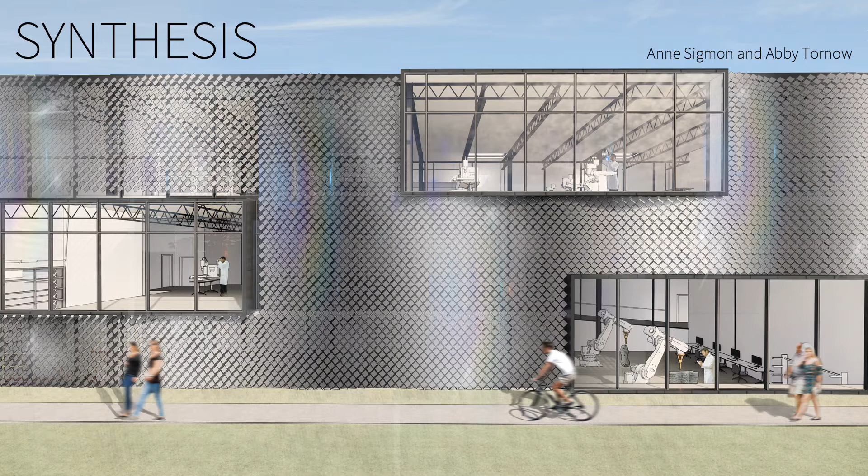Our proposal questions how architecture can bridge a gap between biology and technology. Our design synthesis is a space that utilizes computation and fabrication to construct sustainable and efficient building skins. At the simplest level, an architectural building skin is responsible for providing thermal comfort and protection to its users. But what if a building skin was able to provide for more of the user's needs?

Our site is located in Des Moines, Iowa at a historic Union Depot in the East Village. Throughout Des Moines, we see a range of building skins, from the gold-gilded dome at the Capitol to the copper and glass at the Chipperfield Library. These important buildings have become architectural icons for the city. But what if we widen the range of building skins throughout Des Moines and use today's knowledge of computation, technology,

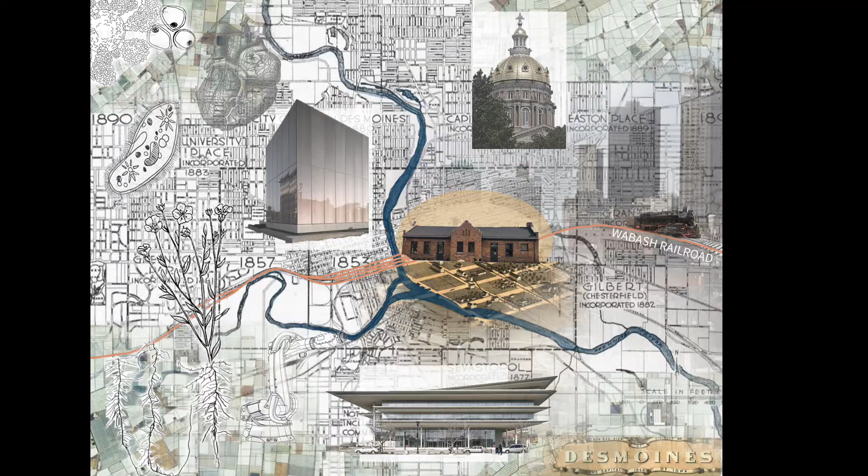and science to maximize efficiencies and sustainable practices? Our architectural proposal allows a space for fabrication and testing of future building materials. The existing historic Union Depot will remain on the site, and our new addition will provide a space for building materials to be fabricated and studied.

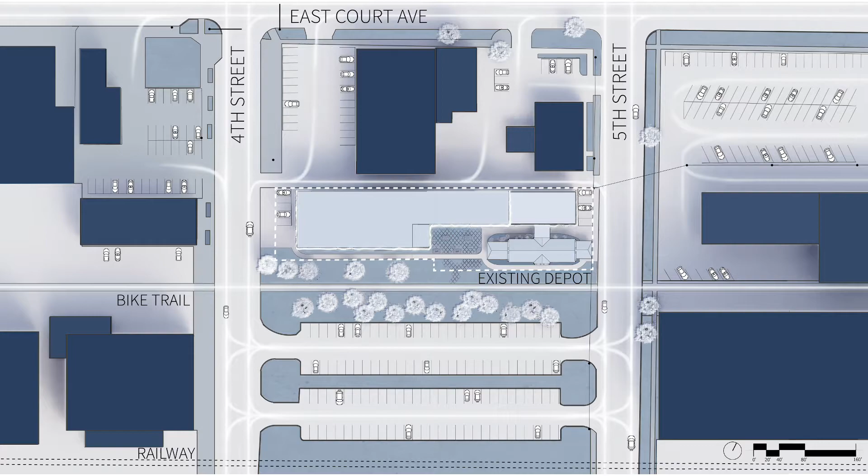Our building houses robotics labs, education classrooms, and a public cafe. The site has direct access to the old railway, which the city is converting into a bike path. This allows good public exposure to the pavilion space.

We have organized our building to maximize our surface area on the south facade. This is where we have designed our own building skin. This will be marked as the first adaptive facade in Des Moines. The south facade is important because of its access to sun throughout the day.

The orientation of our building allows all of our servant spaces, such as mechanical, bathrooms, and circulation, to be to the north of the site. This allowed us to utilize the south of the massing for robotics labs that can be viewed from the exterior.

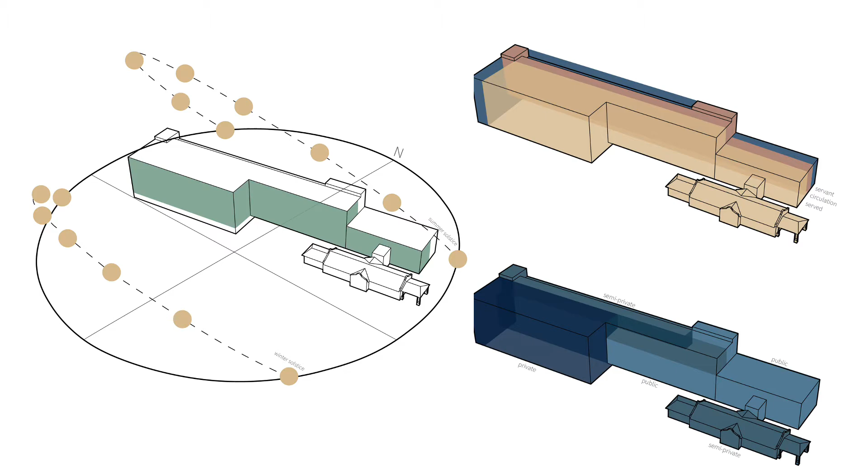Our circulation runs in between the served and servant spaces. The public has access to a majority of the first and second floor, but is able to see into the robotics labs. The third floor is private space reserved for the research team and special events.

Our main entrance is on the east of our building, next to the historic Union Depot. This is where our lobby and shop are located. This also includes a storefront of the existing depot that houses administrative offices.

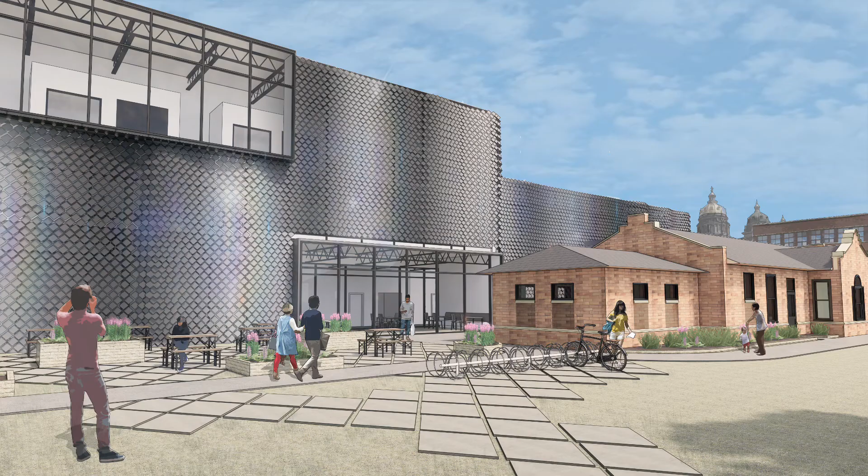Further into the center of the building is our public cafe and dining area, which has great access to the outdoor pavilion. The outdoor pavilion is directly connected to the bike path and can act as a rest stop for people riding through. All visitors have access to the public cafe and can use the outdoor seating.

Our lower level houses our first robotics lab that uses KUKA robots for fabrication. The level is 5 feet below grade, but utilizes a double height space for clearance of the KUKA robots. The public has access to views into the lab because of the accessible ramp running along the curtain wall.

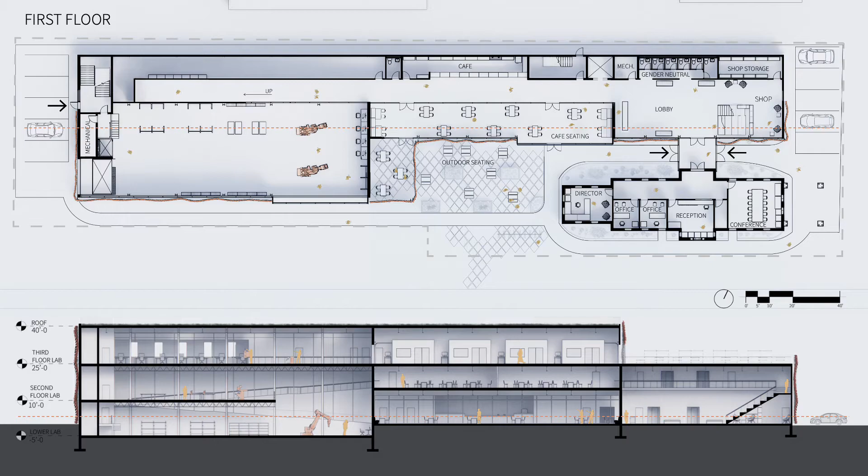There will be a variety of research, testing, and fabrication occurring in these labs. Researchers will study topics such as cell growth, chemical reactions, and ecosystems. The product of the research will be innovative building materials that mimic biological processes, fabricated by current technology.

The ramp also allows views to the fabrication lab on the second floor and access to the education classrooms. These classrooms allow a traditional space for the public to learn about the research occurring in the labs.

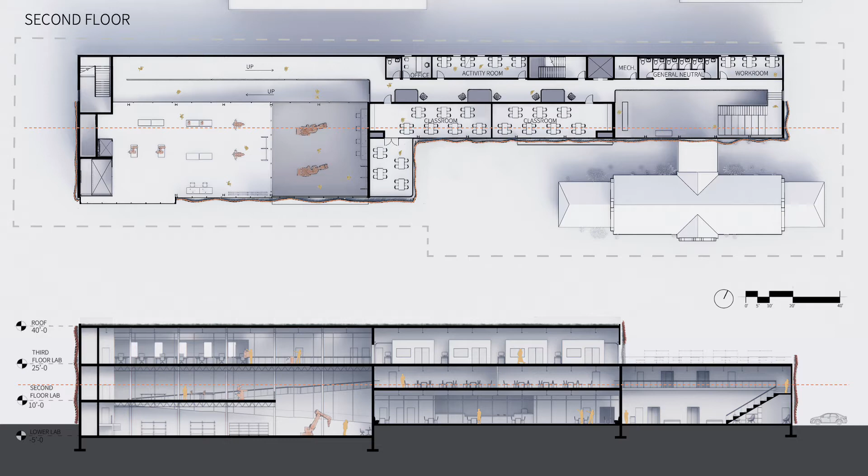The third floor has offices for the research team, an outdoor patio for events, and the remainder of our robotics labs.

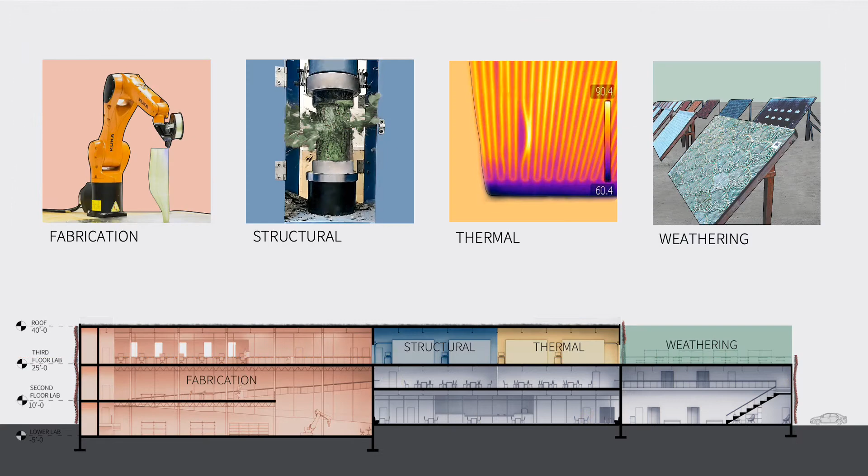The materials are delivered and enter the lab space on the west. We have a freight elevator to move the materials to all floors. The third floor is where material testing takes place, looking at structural, thermal, and weathering properties.

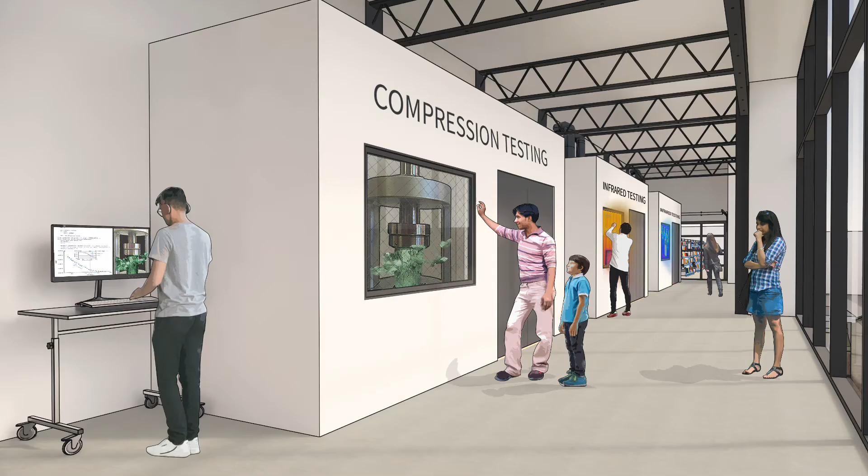We have control rooms that are able to manipulate the variables of the space to test the properties of new building materials. Compression testing evaluates the structural integrity of materials, such as a masonry block grown from bacteria. Infrared testing evaluates thermal properties, and weathering testing exposes materials to the natural elements.

Our structure allows us to have an open floor plan for our lab space, pushing all columns to the exterior. We are utilizing trusses to convey a light and open environment. We have placed thermal chimneys in the center of our building to passively cool our cafe, dining, and classrooms.

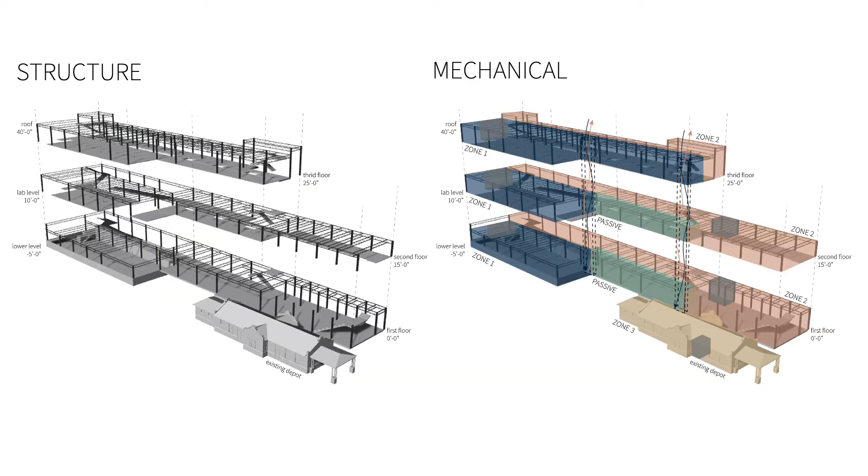We are utilizing a green roof to filter the rainwater and allow it to run down the cavity between our building and facade into an on-site cistern.

The south facade is constructed from soft robotics PV arrays. The facade skin attaches at the curtain wall mullions. We are utilizing custom brackets to vary the distance of the modules in order to create a fluid skin wrapping our building.

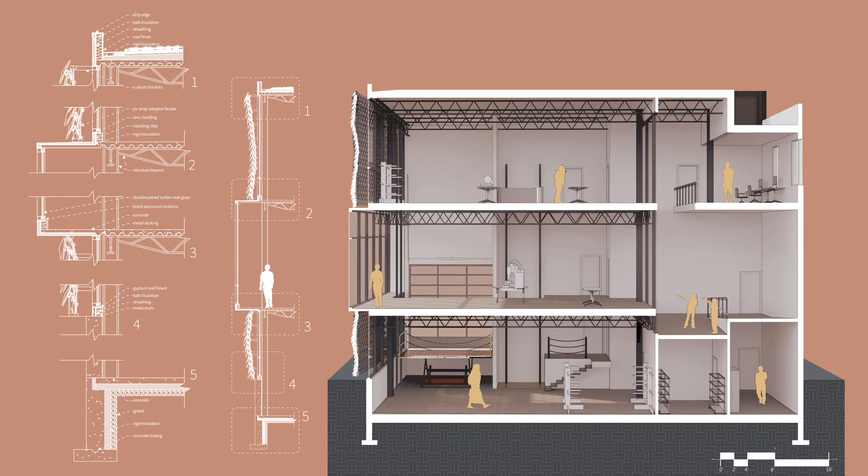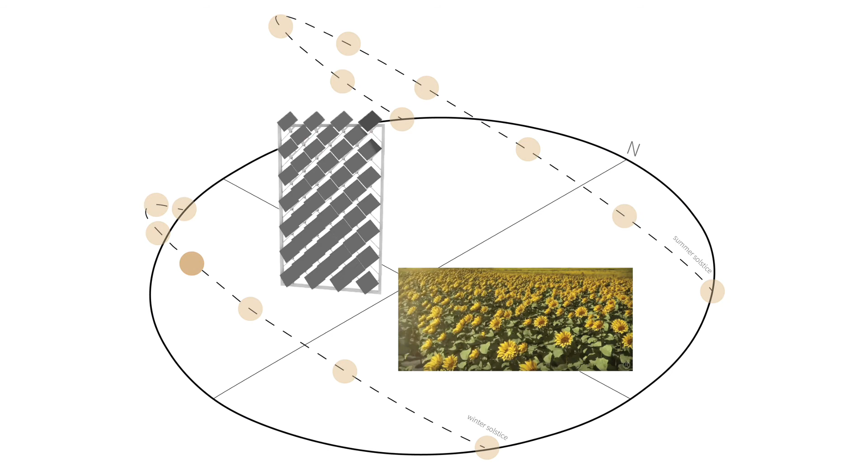The skin mimics heliotropism, the motion of plant parts in response to the direction of the sun. Plants use this process to maximize photosynthesis for energy, and we are utilizing a similar process to produce renewable energy. The skin is able to diffuse direct daylighting into large spaces like our labs and atrium.

Our project is meant to be a space that welcomes the public to learn about current research being conducted using today's technology and knowledge of sustainable architecture.

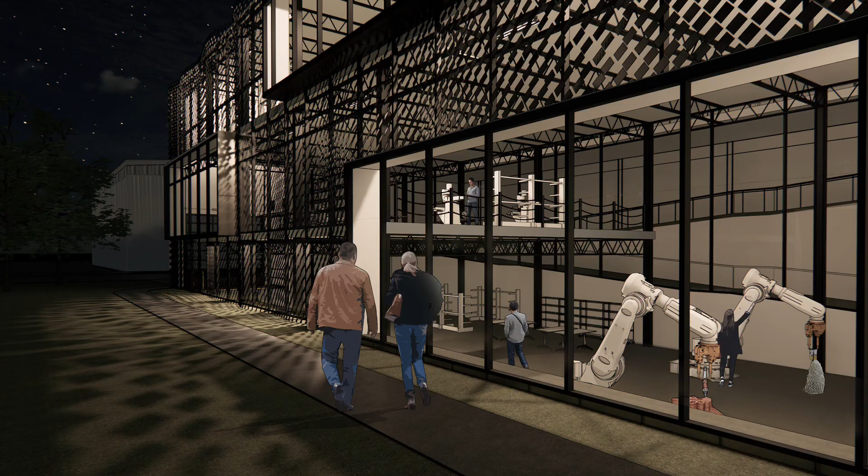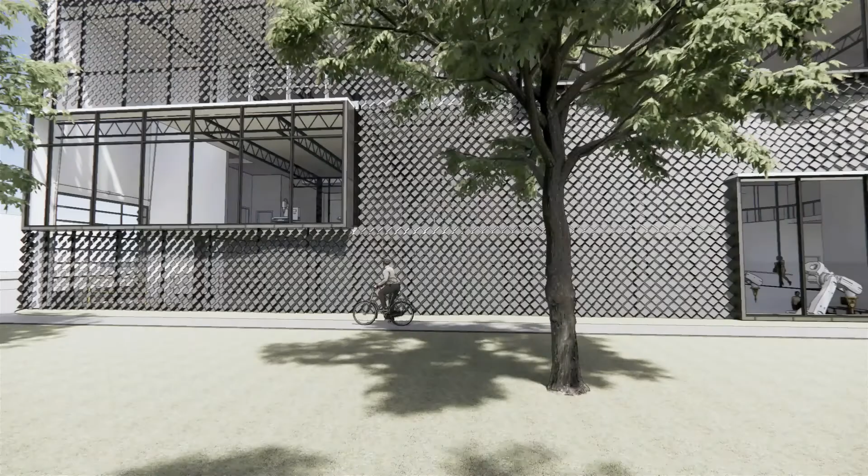The exterior of the building showcases how engineering new facade systems can create new architectural icons for the city. The glowing interior highlights the research behind these innovations. As our project is the first adaptive facade in Des Moines, it is a catalyst for future building skins.

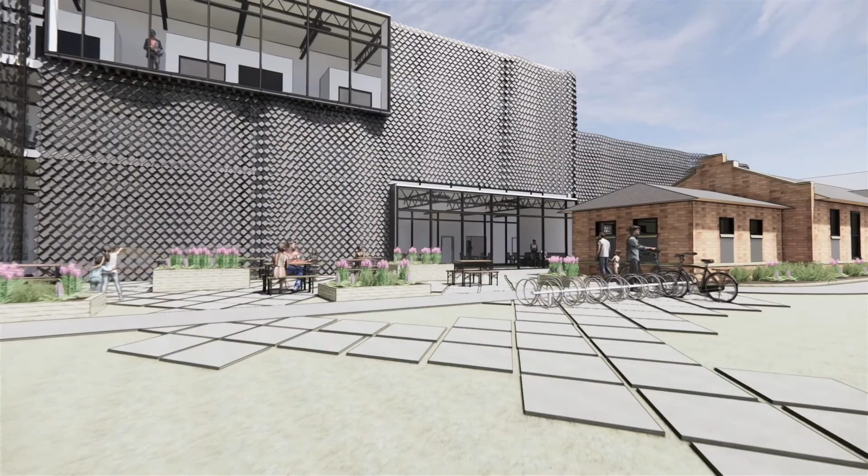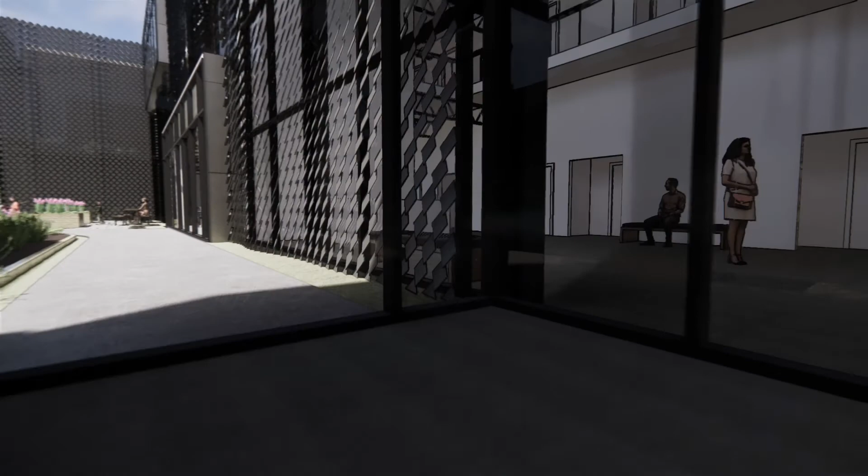As architectural practices change, we should be prioritizing implementing efficient and sustainable systems that positively impact users. On top of providing thermal comfort and protection, architecture can aid a user's well-being through connecting them with natural processes such as solar harvesting. Synthesis represents a space where these processes can be discovered at the intersection of biology and technology.